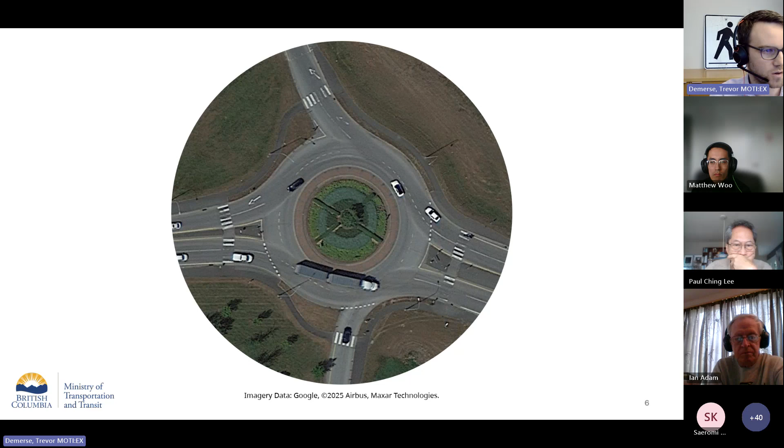Okay, here's how the roundabout looked before the work began. As you can see, it's a pretty old style conventional roundabout. Some of the details there: it was originally constructed in 2003, 2004. It featured dual circulatory lanes, so that just means that there's 2 lanes all the way around the roundabout. Whether they're necessary or not, they were there. And there's these direct merges at the 2 exits, the north exit and the west exit. We also have crosswalks within those merges, or we did.

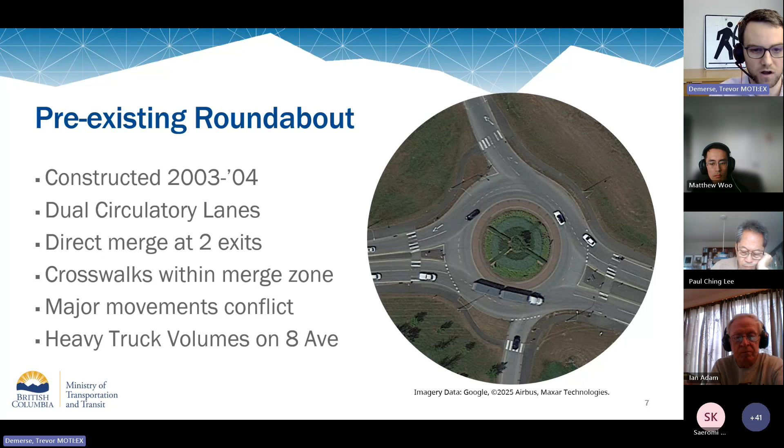Many of the major movements in this roundabout conflict because instead of going straight through a roundabout like you might have on a normal conventional highway, people are trying to access and egress from the freeway. So some of those paths cross. We'll talk about that a little more in a minute. And I do want to also bring some attention to the fact that there are extremely heavy truck volumes on 8th Avenue as commercial vehicles go to and from Highway 99 to the US border crossings, way more than you might expect. Okay.

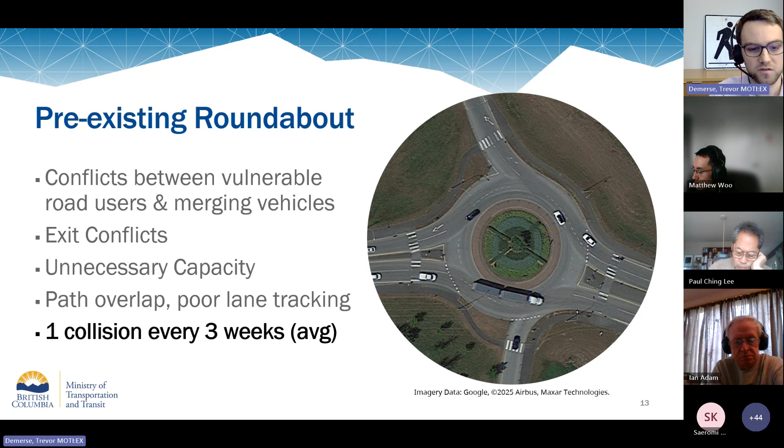And then the collision history. So before the works that we're going to talk a little more about today, we were seeing one minor collision, as we often see at roundabouts, but one collision every 3 weeks on average. Low severity, but still quite a number.

I'm going to switch gears here, and I do want to talk a little bit about the structure of the ministry, specifically our operations teams, and how something like this might come to the forefront of our minds. Operations within the ministry and monitoring the roadway and making sure that issues like this get found is split between two different groups. We have the district operations groups. They are also responsible for things like overseeing the road maintenance contractor, and certainly tracking issues, corresponding with the public, things like that. And then under engineering services, you have my group, which is traffic operations. When the districts need engineering support, they come to us, and as an internal client, we can provide them service.

The district operations team and the traffic operations teams meet all across the province at least every month to make sure that we're keeping track of what's going on the roads, and as emerging issues come up, we address them. What we also do, though, is we track longer standing areas where there may be opportunity for improvement. And this roundabout was certainly a location that qualifies there. We knew of some of the concerns that I highlighted at the start of the presentation, and we were just looking for an opportunity to do something about it.

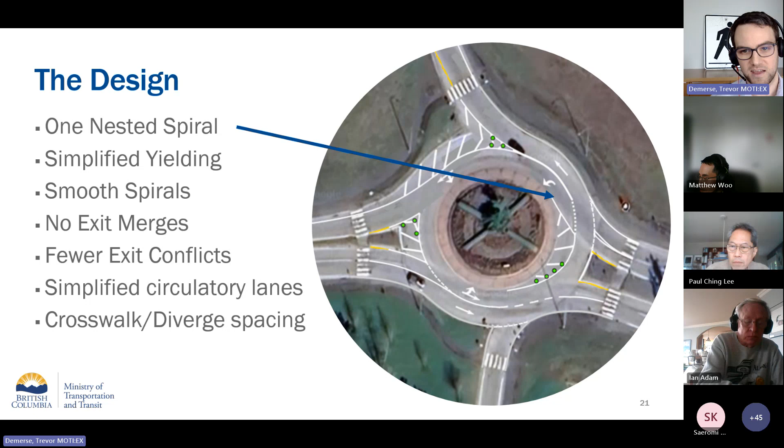Because Highway 99 is a freeway, there's limited opportunity for those walking or rolling to cross Highway 99. And so they do get funneled to our interchanges, and they kind of end up going through this roundabout to access that crossing. So don't think because of maybe the roadside landscape there that there aren't pedestrians. There absolutely are.

Whenever you're doing a design like this, where you have so many constraints, the budget had to fit within the same cost as what reinstating the pre-existing lines would be. We, of course, were restricted to paint and a few small signs. You're going to have to make adjustments. So let's talk about some of the ones we made here.

In a real turbo roundabout, another thing you would typically see would be raised channelization, mountable curbs between different directions to really discourage people from changing lanes. In this case, that wasn't possible. We did use thermoplastic pavement markings to last longer, but nothing you could call raised.

On the west side there's no forced spiral. That was just to allow a specific U-turn movement we wanted at that location. I'll just put the highlighter on here again. This section here, almost nobody uses this lane in the pre-existing condition. It doesn't serve any major movements, but there is the occasional U-turn. So someone coming this way may want to do that. So that was sort of an adjustment from a normal turbo design.

And we did modify this lane entry there. And so that is this specific location here. You can see on this example, again from turbo-roundabout.com, these turbo roundabouts usually have this really sharp entry. And I was able to ask at the TAC conference last year about why designers think that's important. And it really is just to stop a car like this red car from going into the nested lane. It's just to channelize people toward the outside to get that full turbo effect.

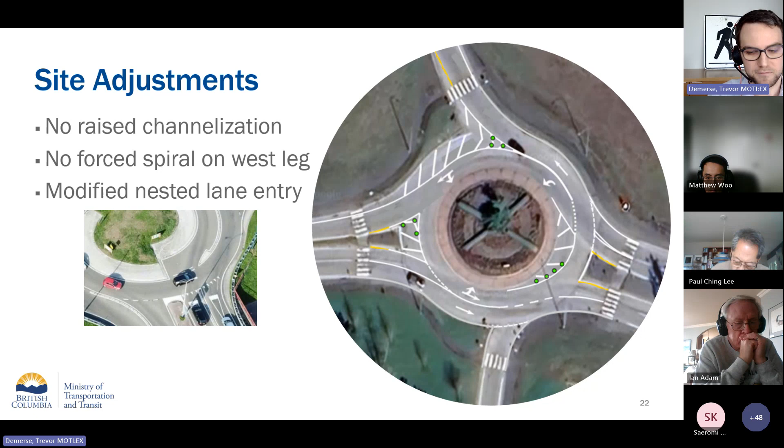So why did we call it a turbo roundabout when we were talking to the stakeholders we needed to buy into this? Why did we use that terminology? I think it comes down to we saw the elements that we did end up using as really important to solving the problems we had. Some of those turbo elements, which reduce conflicts, especially on the exits, were really important to achieving our goals. And we wanted to bring that to the forefront and find a way to communicate to people what we were doing here. So it was the use of those concepts, even if a purist may say that we didn't really get the turbo roundabout fully here.

All right, so when it comes to implementation, because this moves so quickly and because of the informal nature of the layout drawing, I did end up going on site and monitoring the layout, and I was just absolutely blown away. If you ever have an opportunity in your career to go watch an intersection layout or a roundabout layout, you really have to.

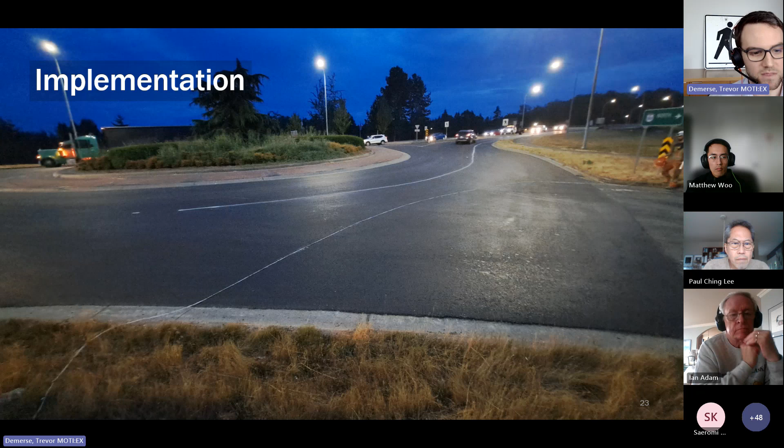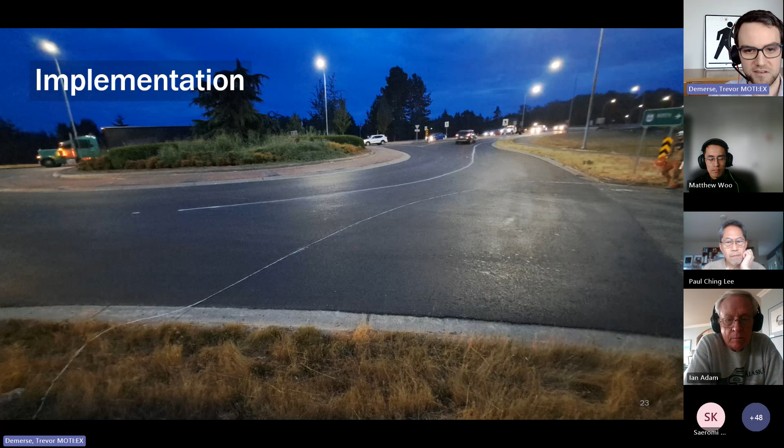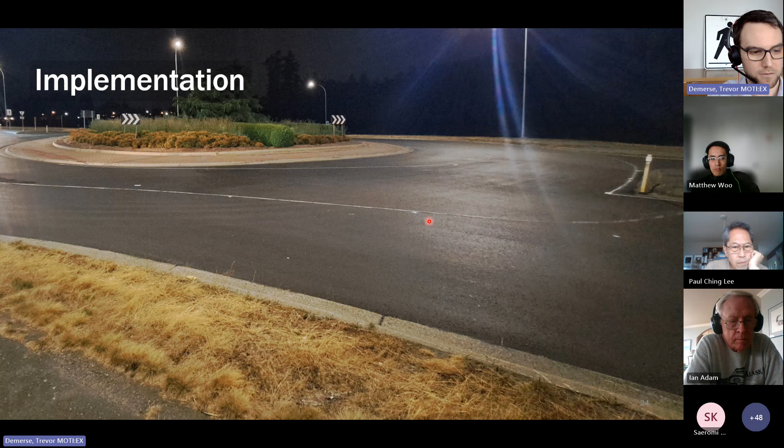They were phenomenal, and they were able to take those drawings and make them real in the world really, really quickly. So if you've ever wondered how they do that, it's absolutely an art, and I recommend taking that opportunity to see that. So here we are. This is the first line going in. Later on, you can see they're working on a different part of that. The chain is still visible there. Coming along here, they're about to do the separator line for the exit. And by the next morning, you can see the lines are in.

It was absolutely phenomenal. So I worked a full day, my normal job, I guess you could call it. I went and watched them do the layout all night. And then I worked another full day, and then I came and saw it all painted. So that was a pretty exciting time to see something go from the page to real in the real world that you could see and you could drive. Very, very exciting.

One more shot. Here you can see a lot of those smooth paths through the roundabout. You can see that lane to the left that's been closed off. Drivers were experiencing this for the first time, and I think they did great. I think people really understood what we were doing.

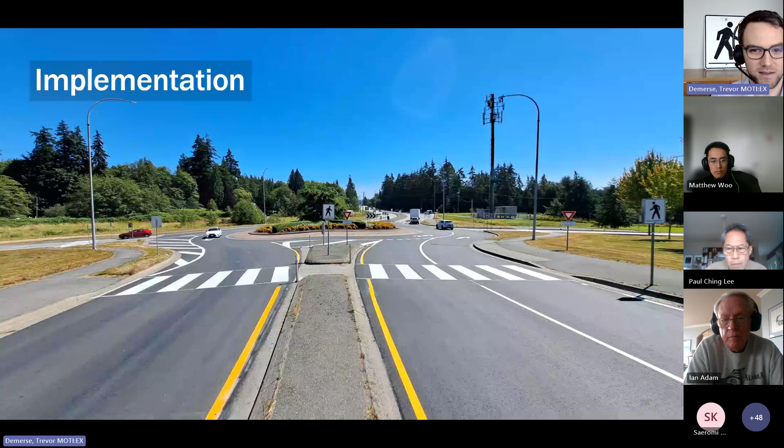Some locals will invariably show up and give you their feedback and ask their questions, and I had some really fun conversations with people wondering what we were up to, asking good questions like, why do you need a hard hat when you're painting lines? Things like that.

So the outcomes. I didn't want to bury the headline here. Since the conversion was done last summer, we have had zero reported collisions in the Ministry of Transportation and Transit Collision Information System. ICBC claims data would likely report minor collisions. Claims don't make it into CIS. But still a massive reduction in minor collisions and certainly no serious ones reported. We're very, very proud of that.

Additionally, we've had extremely positive feedback from local drivers and commercial vehicle operators. This is the project that got me my second public commendation ever, a letter of someone saying, wow, you guys did something that is really great. I've only had two in my career, and this is the second one. So people were really, really happy.

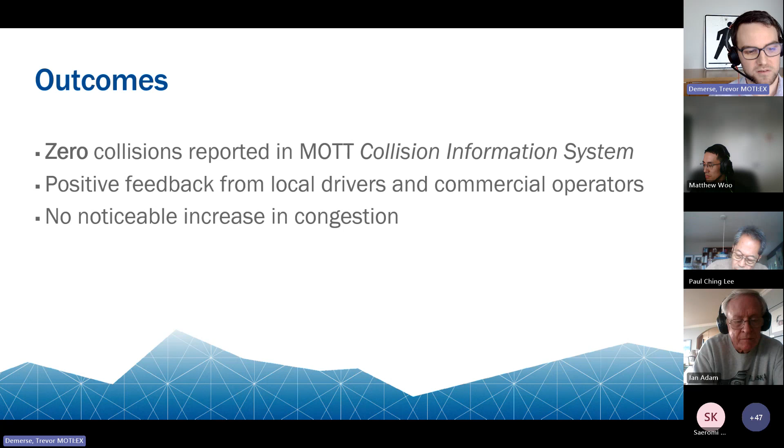And no noticeable increase to congestion. That's important because when we talked about removing lanes and removing those merges, people thought we may really be impacting the ability of this roundabout to process vehicles. But we knew, given the placement of those merges, they were really limiting capacity through the intersection anyway. And it was much better to create an operation that was smooth, predictable, and in the end, it had no noticeable increase in congestion.